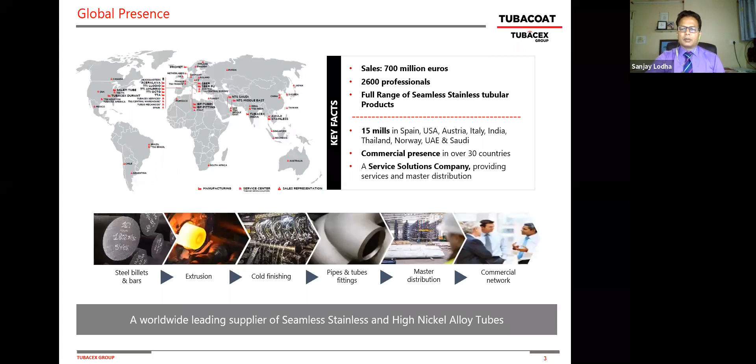So just briefly on Tubacoat, it's a global leading supplier of seamless stainless steel and high nickel alloy tubes, with a presence around the world: 15 manufacturing sites, including Spain, which is headquartered in Bilbao, USA, Austria, Italy, India, Thailand, Norway, United Arab Emirates, and Saudi Arabia. We do 700 million euros in sales, and we do the entire cycle chain, from making our own steel at our mills in Spain, to extrusion, cold and hot finishing, and finished products, whether they are flanges or tubes and all the pipes, then master distribution in more than 30 countries, with a commercial network.

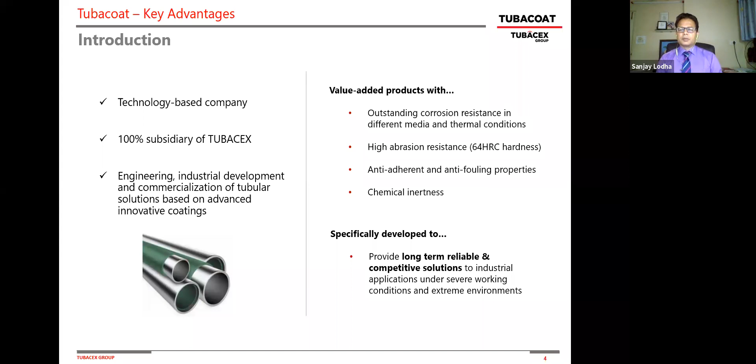The critical applications we focus on are oil and gas, chemical industry, petrochemicals, and power generation. The equipment we work on includes furnaces, heat exchangers, boilers, tubular reactors, and condensers. This is where we employ this tubular technology, and this coating can be internal or external depending on the application and conditions, and these coatings can also be customized.

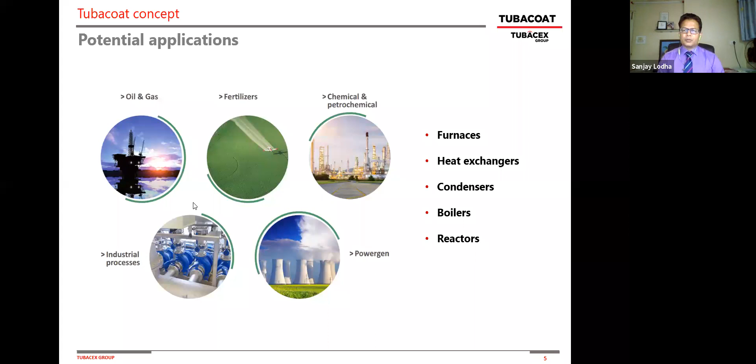I'm going to take you through some key properties of this Tubacoat technology, such as the morphological properties, mechanical properties, chemical properties, and thermal properties, so the audience has a feel for why these properties help against corrosion, against fouling, and against coking.

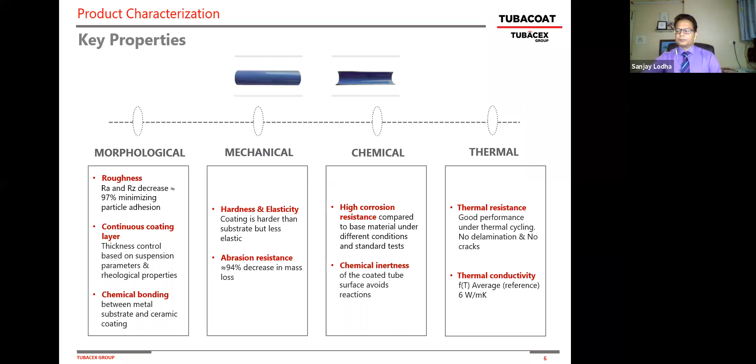This coating is a continuous, homogeneous layer managed through an automated process and rheological suspension properties. In this automatic control process, the coating is 150 microns, or 0.15 millimeters, and we're able to control the thickness across the length of the pipe with the same thickness, measuring minimum at the start, middle, and end, getting minimum, maximum, and average thickness properties, controlling thickness in a very unique way.

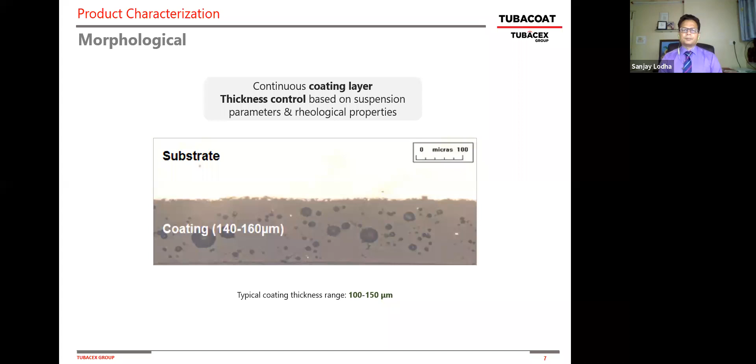The surface of the coated tube is equivalent to a glass finish, a mirror finish, very smooth. The smoother the surface, the less resistance to flow, and the less resistance for particulates and metal compounds to deposit on the surface and begin the fouling process. By having this smooth surface, we're minimizing any tendency for particulates or other matter to deposit and begin the fouling and corrosion process.

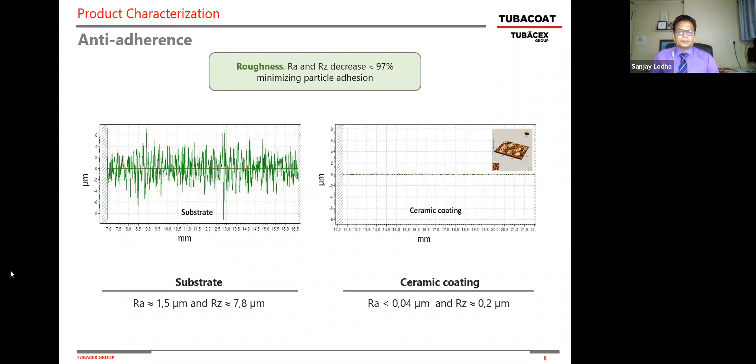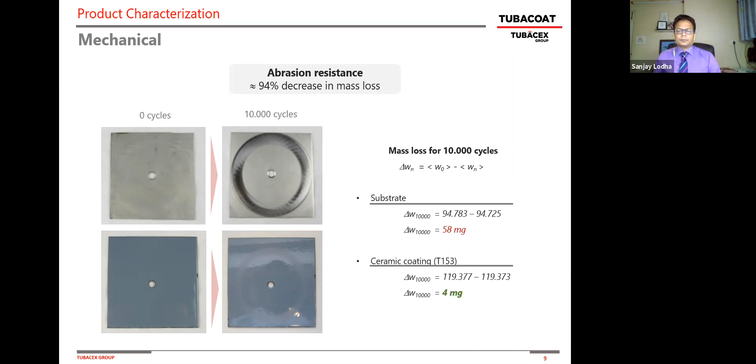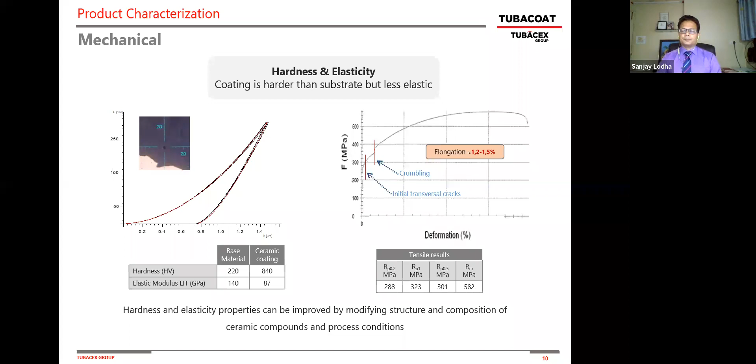In any refinery or petrochemical process, you have startups and shutdowns, rapid heating and rapid cooling - just like online spalling in a delayed coker, or steam air decoking, or pigging. At least for the first two, where you have thermal shock with expansions and contractions, this property comes in very handy.

We take the thermal cycling up to 450 degrees Celsius, close to 850-900 degrees, then do rapid cooling over many cycles. On the right side, another chart shows us taking the temperature from 1200 to 1500 degrees Fahrenheit in intervals, then doing rapid cooling to ensure there's no damage to the coating or delamination, because that's exactly what happens in online spalling - you have contraction and expansion along with steam heating and cooling, and the coating material expands and contracts accordingly, similar to the substrate. This property is very important.

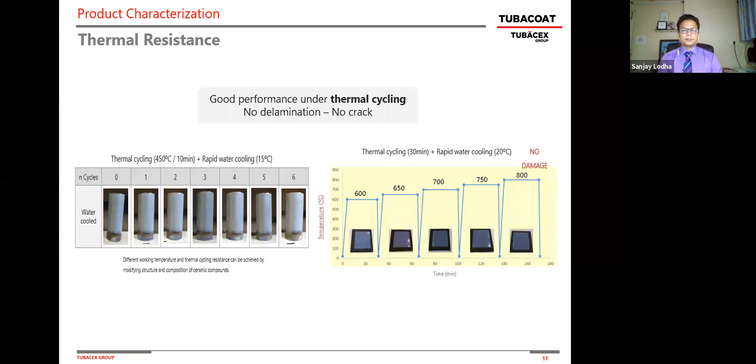As we all know, fouling is a very important property and discussion for any heat exchanger or heat transfer media. Across refineries or petrochemical plants, we have hundreds and thousands of heat exchangers, and they all have fouling issues that happen due to chemical reactions between products, precipitation, or corrosion. So a critical part is how you minimize that fouling.

When you apply this coated tube inside the tube, the deposition rate of particulate or fouling matter decreases because the tubes are chemically inert and very smooth, like a glass finish. Also, the removal rate of this fouling material increases because it won't stick to the surface of the tube. Because of that, heat transfer loss is reduced significantly, and since you don't have that fouling and heat transfer loss, your fluid flow and process throughput maintain at a steady state. That's an important characteristic of the Tubacoat.

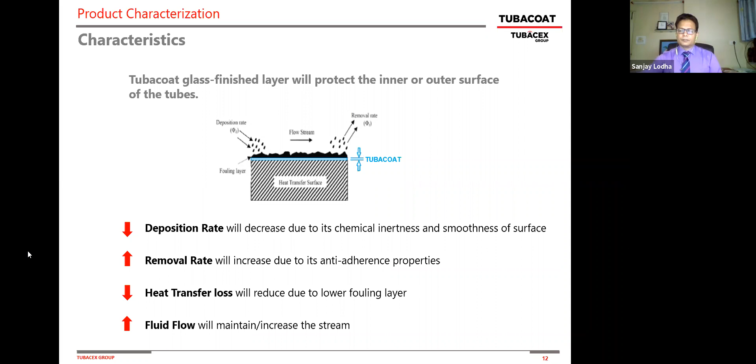This is a study done on the fouling rate by a major US refinery over a period of 7 months using crude oil, heavier feedstock. What you see here is the rate of fouling at a given velocity. The blue dots are for the baseline carbon steel tube, and the red dots were taken at a given velocity of 1.2 meters per second. You can see significantly higher fouling avoidance for the coated sample, and eventual deposition doesn't adhere to the surface because it's very easy to remove. The difference is as much as 4 times on the high side, showing the rate of fouling being reduced for the coated tubes.

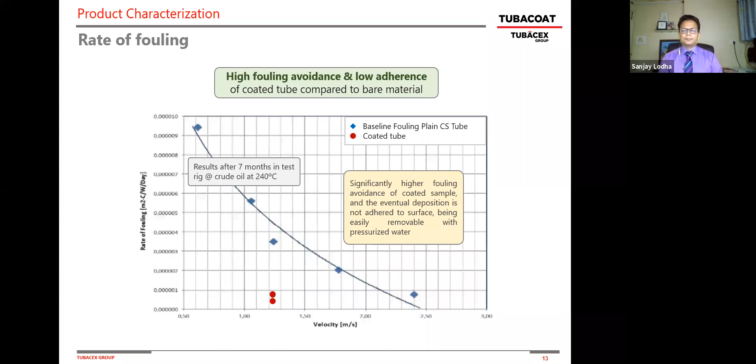This is another example of the chemical properties. I took one example of hydrochloric acid and sulfuric acid over 2000 hours: 10% hydrochloric acid at 22 degrees, and sulfuric acid at 30%, which is very corrosive. Using the European test in both conditions, this Tubacoat material holds very well. There are many more tests we've done with molten salt, sodium hydroxide, you name it, and this holds very well in most applications.

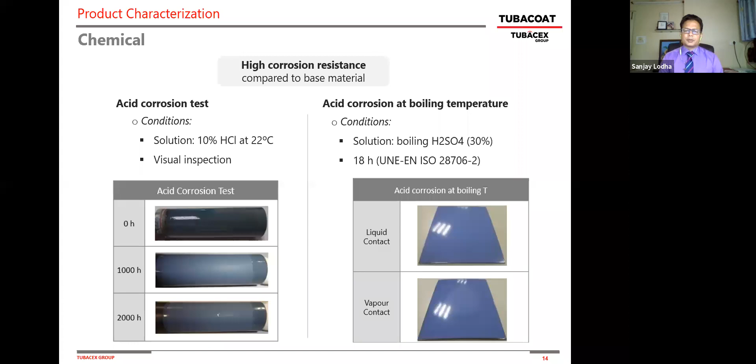In summary, this coating is vitrified above 1470 degrees Fahrenheit, about 800 degrees Celsius, and because of that vitrification, there is a chemical bonding and glass-like properties between the substrate and the coating material. Because of that, we're able to bring that coating to a very low roughness, which helps with fouling and coking resistance. The chemical bonding created through vitrification gives a very strong chemical bond that provides excellent corrosion resistance. The hardness is 4 times greater, giving very good abrasion and erosion resistance.

The chemical bonding gives us a window where you can operate these coatings close to 1500 or 1550 degrees Fahrenheit, and that works very well. As I explained, this coating is an automated proprietary multi-step process, so it can only be applied in our factory, not at the site. What we do at the site is small repair jobs, small welding jobs with portable instruments. Otherwise, most of the work is done in our factory.

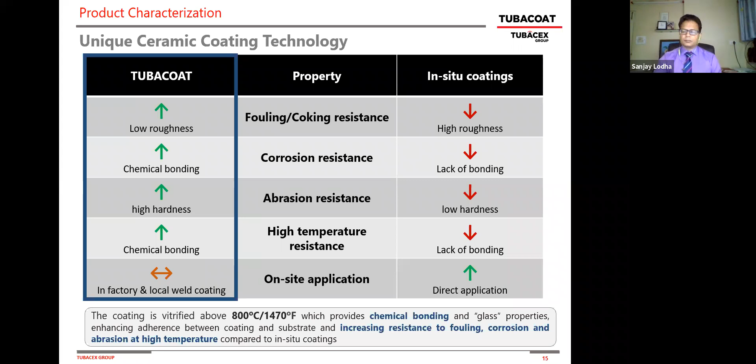Now I'm going to explain the coke deposition in fired heater tubes. Next slide.

I think most of you work in a refinery, whether in a Visbreaker, a delayed coker, a crude unit, or a vacuum unit. We have these high conversion process units that process low value, heavy feedstocks, whether it's gas oil, vacuum residue, or atmospheric bottoms, and you try to run them through a conversion unit to make high value distillates or clean fuels.

I'm showing a picture here of a delayed coker. Besides the distillates, you also make coke. In the process, you're thermally cracking the feedstock, and you're creating coke that deposits in the radiant section of the furnace, and that is a problem. Next slide, please.

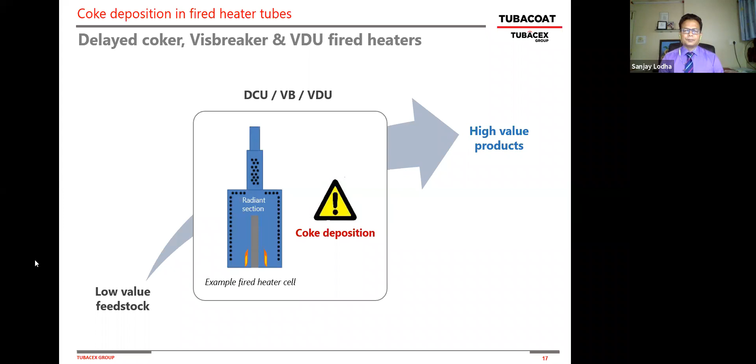As you can see through the tube, as the coke layer grows, heat transfer reduces, tube skin temperature goes up, you have hot spots, your effective heat transfer area is reduced, and you have a pressure drop. You come to end of run due to high temperatures or pressure drop, and you have to shut down, do online spalling, steam air decoking, or mechanical pigging.

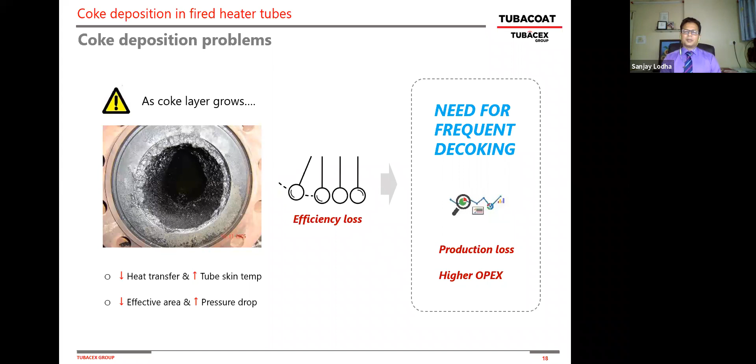And when you do that, there is a cost reduction in throughput, huge conversion cost, maintenance cost, safety cost, and all that is a dollar value.

Now let me take you through a chemical inertness and coking resistance study that we did with a university in Europe to explain some more properties on how this Tubacoat technology works against coking.

Coated tubes have two things that work very well for heater tubes. One, these coatings are chemically inert, so they minimize the coke forming reaction. Second, once you form coke, does it stay in the coker furnace tubes or move further to the coker drums? It has an anti-fouling, very smooth, anti-adhering surface that allows minimum coke deposition. Because of these two properties, you get significantly longer run length between spallings or decoking.

Since the surface is much cleaner, your fuel consumption is lower. And since you don't have as many spallings and piggings, there is improved safety and reliability. So the advantages are very well explained.

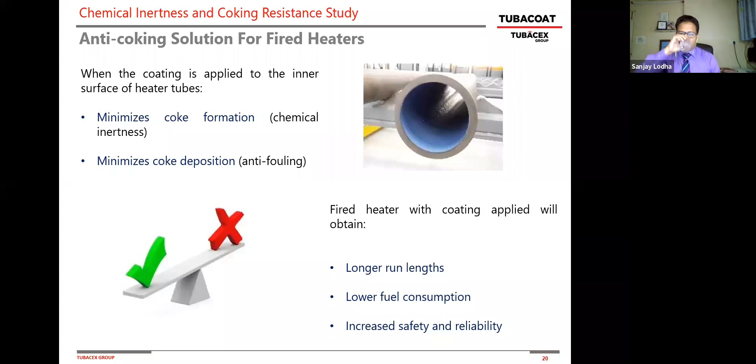This experiment was done with the European university, where we took the chemical compound dimethyl ether and cracked it. If cracked properly, it's equimolar cracking into carbon monoxide, hydrogen, and methane, generating no coke - that's the thermal route. But this doesn't happen in real life. You have many side reactions: the Boudouard reaction that breaks down carbon monoxide to CO2 and carbon, and methane decomposition into hydrogen and carbon - this carbon is what you don't want in the furnace tubes.

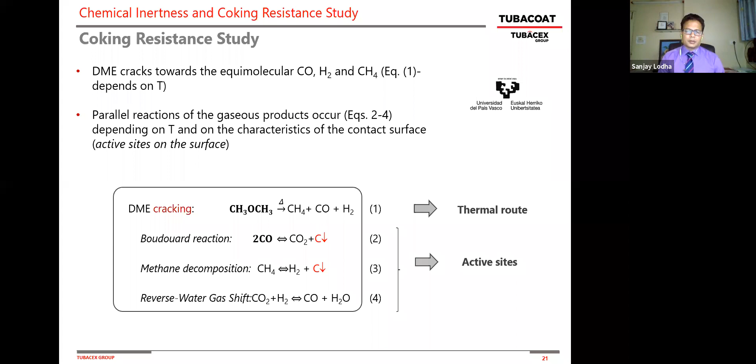What we show in this slide is from an experiment done at the university in a furnace heater, with multiple cycles. What you see here is one heater without the coating, the other with the coating.

In Cycle 1, looking at T10 conversion for the non-coated tube, the temperature is 587 degrees. When you shut down and start again, T10 starts 100 degrees earlier, indicating you're promoting the carbon forming reaction because the metal surface takes an active part in it. But with the same substrate using a coated tube, on Cycle 1 and Cycle 2, there is no difference in startup run T10 temperature - T50 and T90 are almost identical, proving that the chemically inert coated tubes prevent or minimize coke forming reaction through multiple cycles, where the active metal otherwise promotes carbon formation.

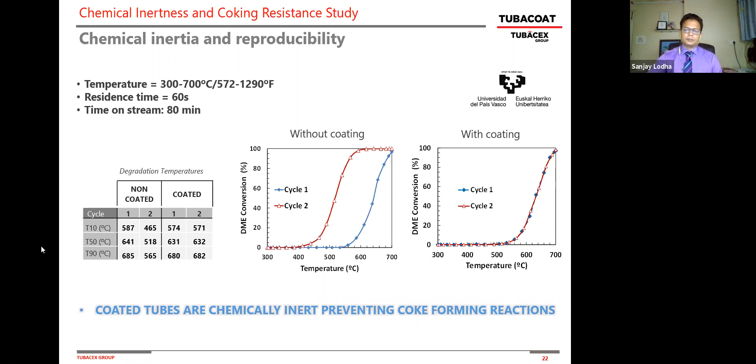This slide shows the carbon forming reaction - we use an equation to determine how much carbon is formed. What you see here, without coating versus with coating, there's a huge difference in the amount of carbon formed - a factor of 10 times lower carbon formation.

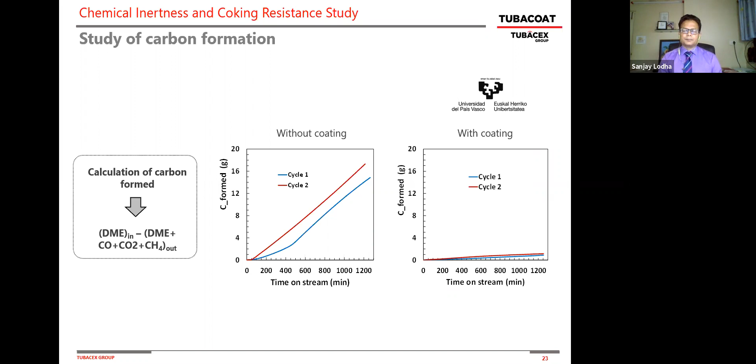Once you make the carbon, where does it stay - does it deposit on the tube surface or not? In this experiment, we burn the carbon through an oxidation process and integrate CO2 chromatograph curves. On the surface without coating, you see very high CO2 curves over a significant period, 400 minutes, 360 minutes. But with the coating, there are no CO2 curves and it goes away within 60 minutes, reconfirming that carbon deposition is very, very low on the coated surface.

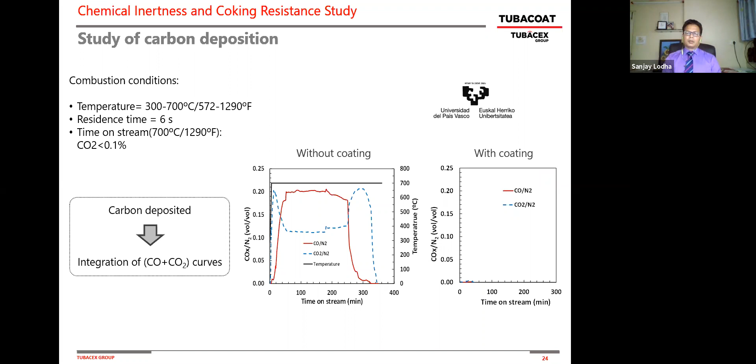In summary, the chemical inertness of the coated surface avoids coking reactions. Carbon formed is 10 times lower, and whatever carbon is formed, its deposition is 100 times lower - significant improvement in both carbon formation and carbon deposition with these coated tubes.

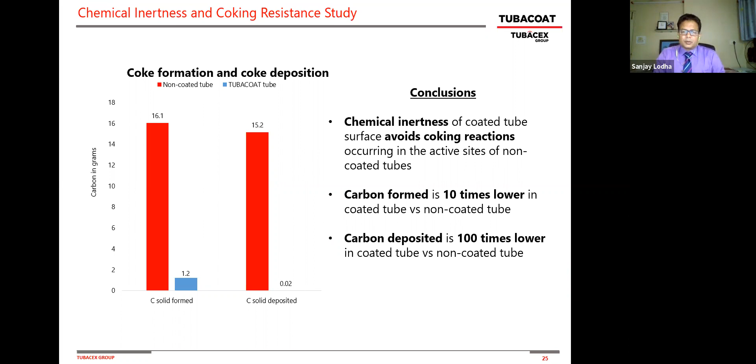Now I'm going to get to the real subject of the case studies. As I said, some have already been implemented, some are already in the pipeline, and some are yet to be implemented. I put together 5 or 6 case studies and different examples, and now I'm going to go through them.

And so they have a quite frequent shutdown for pigging. To be accurate, they do 2 piggings per year, and that is about 8 days of shutdown. That's a significant loss of production.

Then they have a pre-heat exchanger upstream of the furnace that is also taken out of service due to coke accumulation, and poor heat transfer that gives you higher fuel consumption. So they agreed to go with the Tubacoat solution, 4-inch dia, inner coating, schedule 80, 317 stainless steel, and also the flanges and the bends.

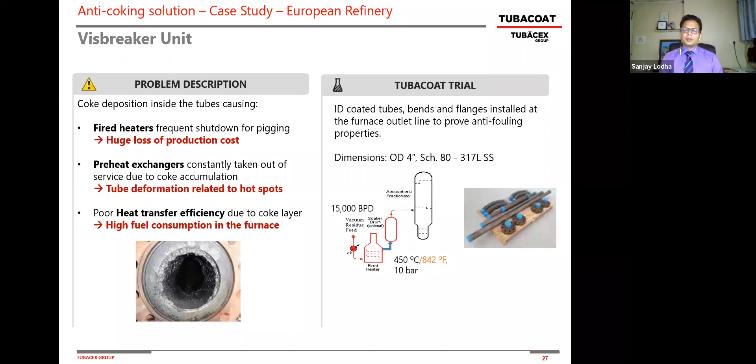We supplied that. Next slide, please.

So trial after 9 months, now it's been 14 months, but this was done at the 9 months. What we saw after 9 months is a very thin coke layer, not even detected by the radiographic test, and in essence, a 75% reduction in the coke deposition.

And whatever coke that was there was very, very easy to remove, 3 times lower the water pressure. You can just put some water and it will come off. Basically confirming that in commercial applications, these coated tubes are able to help in minimizing the pigging or similar activities.

And what we saw in the conclusion, 8 days of downtime, or 7 days of downtime, throughput value was $1.1 million for this given unit, and some other benefits such as a reduction in maintenance, a benefit of fuel consumption and heat exchanger cleaning, altogether $1.5 million per year.

Return on investment much less than 1 year. Next slide.

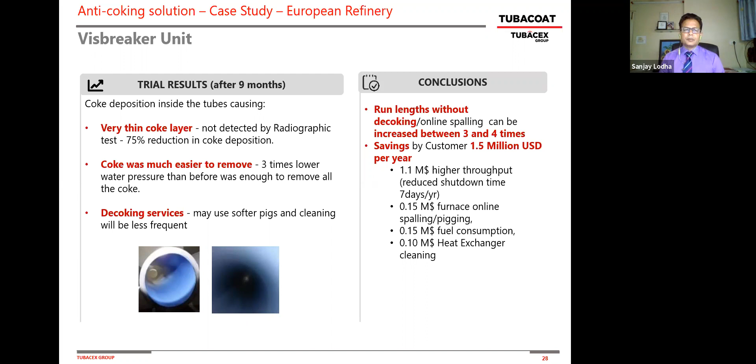This one is a delayed coker unit in Asia. It's 1 delayed coker with a capacity quite big, I think it's the second largest in this part of the world. 124,000 barrels a day. Has 3 furnaces, 6 passes. Each pass has 30 radiant tubes. Very common P9 material that's used in mostly many delayed cokers we see around the world.

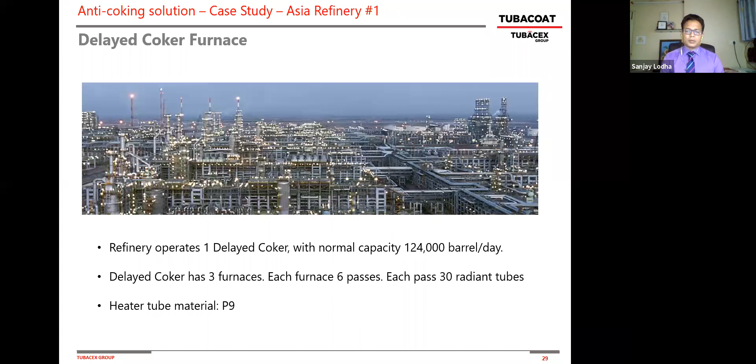So they have a frequent decoking as required due to coke buildup. One, because of the high pressure drop. Second is the high tube metal skin temperature. And they take out each furnace for pigging every 3 months, and also online spalling every 30 to 45 days. They do 2 passes per furnace, and they have 6 passes per furnace.

And during the pigging, their capacity is reduced to 70%, and during online spalling, their capacity is reduced to 93% while they do the spalling.

And with our modeling work, we work with the customer based on their information. Every time it's taken out of service for pigging, the cost is over 4 days, 3.6 million every 3 months. And also when they do the online spalling, reduction in throughput is about $125,000 cost per furnace. So it's quite significant. Next slide, please.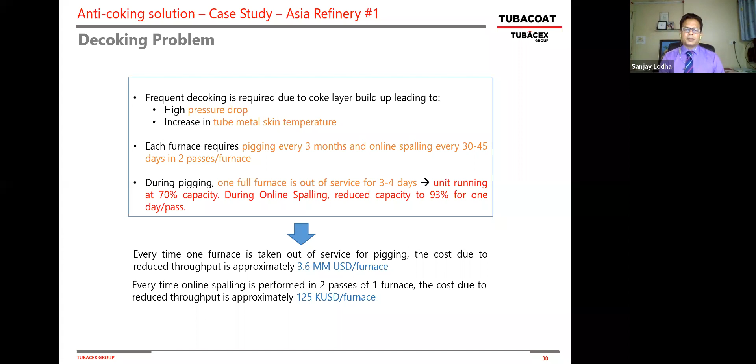So we did Tubacoat technology solution modeling for the unit, and what we see here is the cost of the tube over a 5-year period. When we say the cost, we include the cost of the tube along with the advanced coating Tubacoat, plus cost due to reduced throughput during decoking and cost due to higher fuel consumption.

And by extending the run length without decoking by 3 times, we're able to give them $10 million benefit per year. Over 5 years that's about $50 million if they were to do all the tubes and radiant section with the Tubacoat technology. Just the online spalling, instead of 30 to 45 days, it would be 90 to 100 days,

and mechanical pigging, instead of every 3 months, it will be 8 to 9 months. That's a significant value for any refinery, any customer. Next slide, please.

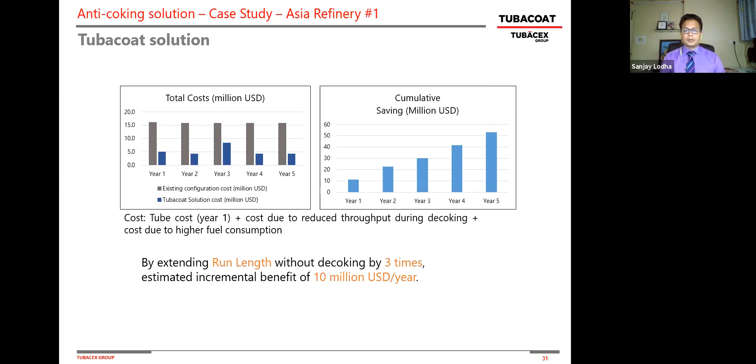Now, everybody has questions, and I saw some questions in the chat room about whether this coating works with online spalling, steam decoking, or mechanical pigging. So I just put a slide, and that should answer many questions.

So the coating is designed to withstand online spalling because it's designed for high temperature and for thermal shock, and the coating has the same coefficient of thermal expansion as the substrate. And as the substrate can change from P9 to 347H or anything else, we're able to customize the thermal coefficient of expansion for each substrate.

Second part is mechanical pigging. Of course our regular pigs, which are 82 or 84 Rockwell C, are a bit too hard for something like this coating. So we have worked with the coking company, and we have come up with pig studs that are a little bit softer, 64 Rockwell C or 800 Vickers number, and they can do the mechanical pigging without any damage to the coating surface.

And they can be available to any customer anywhere in the world. So we just modified that.

And also remember, when we use these coated tubes, we're reducing significant amounts of inorganic contaminants, such as the iron sulfide and the solid coke. So the mechanical pigging requirement is significantly lower, but also the material you have in the tube that's coking is significantly lower for the inorganic materials. That's another part. Next slide.

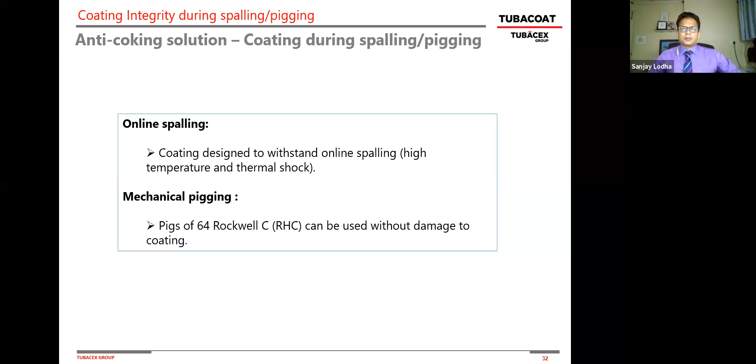This one is another coker in Asia, again a P9 chrome material, 42,000 barrels per day unit. They do spalling every 50 days, 7 spalls per year, 6 days per spal, that's 42 days they run at 85% throughput. If they were to run Tubacoat technology, their 85% throughput time would reduce from 36 days down to 12 days. They would have 24 days of savings at full throughput value, and that's $3 million per year benefit just from the throughput.

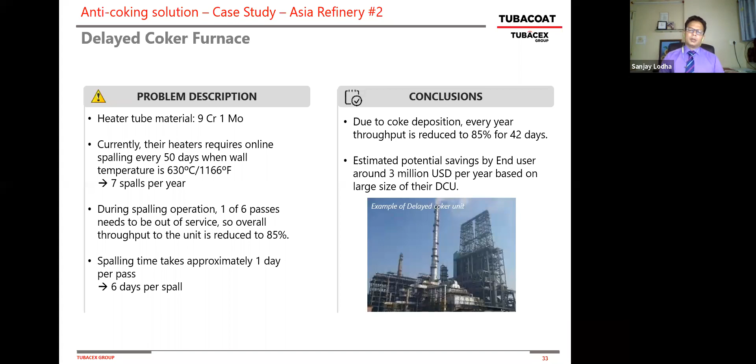This project is in the pipeline, in the budgeting phase, and will be implemented sometime 4Q 2021 or sometime in 2022 with this particular customer. Next slide, please.

This one is a North American refinery on the West Coast, and their heater tube material is 347H, which has a higher end-of-run temperature, maybe another 50 to 100 degrees Fahrenheit over the P9 material. So many companies now prefer 347H - more expensive, but it gives higher end-of-run temperature, which helps on the OpEx side. This heater requires online spalling every 2-3 months and mechanical pigging once per year. Total shutdown is 6 days for pigging, and throughput is reduced to 75% for spalling over 16 days. Potential savings of $2.5 million.

The project was to be implemented in March of 2020, but because of COVID-19 and the oil scenario, it has now been moved to 2021. We'll keep you posted on the outcome of this trial as well. Next slide, please.

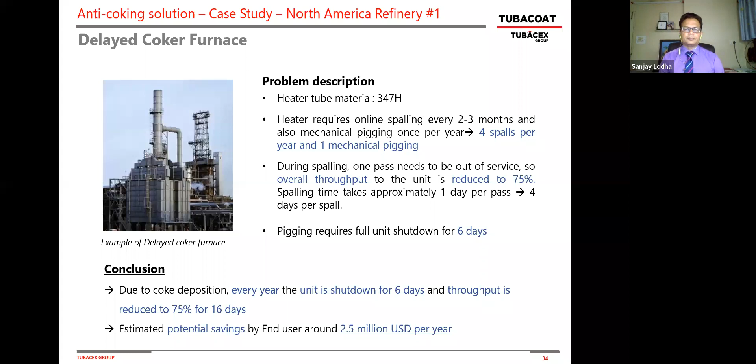This one is something we just did recently, a vacuum distillation unit furnace. This furnace outlet line had a severe coking problem. Again, it's a North American refinery where they have this outlet line replacement due to coking. These are 8, 10 and 12 inch OD tubes that have to be replaced every year or every 13 to 14 months, with frequent decoking operations and mechanical pigging. There were also a lot of traces of polythionic acid stress corrosion cracking. We just supplied these tubes and they'll be installed very soon.

Base material is 317L stainless steel, OD is 8 inches. Working with the customer, validating the modeling work and feedback, we expect return on investment in less than 1.5 years. I will keep you updated in our next presentation on the future performance of this unit. Next slide.

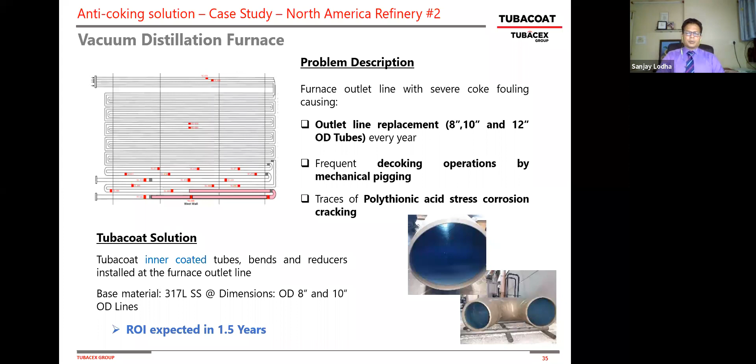This one is a resid hydrocracker, again in North America. They have 8 resid hydrocrackers feeding very heavy gas oil feed, and they have close to 800 risers used for proper feed distribution in the reactor. Temperature close to 750 degrees Fahrenheit, 130 bar pressure, and due to the velocity regimes of the hydrocarbons, they have severe fouling at the bottom section of the hydrocracker risers. Once they have this fouling and cracking, it leads to maldistribution, and they're not getting the conversion they would desire. With the coating, they will be able to minimize this erosion and fouling, and we expect a far better conversion.

Again, this project is for 2021 due to COVID-19, and we'll keep you posted on the benefits that come out of this trial as well. Next slide.

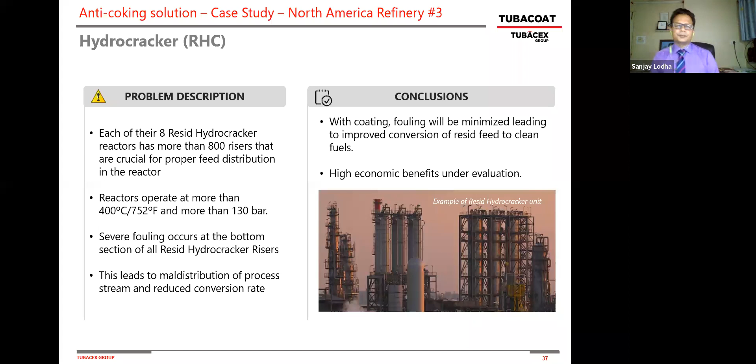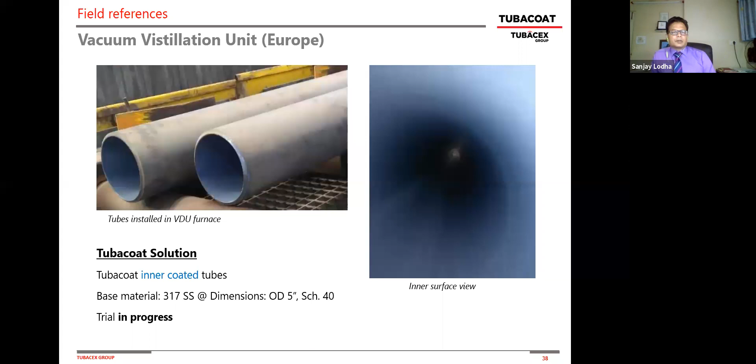So I'm going to take you through one more commercial example. I think I covered quite a bit of coking issues in the delayed cokers, visbreakers, and vacuum units. Now I'm going to take you through another corrosion issue, again with a refinery in North America, where they have a huge corrosion problem and how they implemented the Tubacoat solution. Next slide, please.

Okay, as you can see on the screen, the flue gases in this recuperator heater in the coker calciner are extremely corrosive - you've got sulfur, you've got vanadates, a very corrosive environment. Metal surface temperature of 570 degrees Celsius, close to 1000 degrees Fahrenheit. You can see the tubes basically can't survive this environment, causing chemical corrosion due to these vanadates and sulfur. They have to plug the tubes, which is a huge efficiency loss and operation cost, and they have to reduce throughput in the coker calciner. Their current material is TP310. They tried many other metals and alloys, nothing worked.

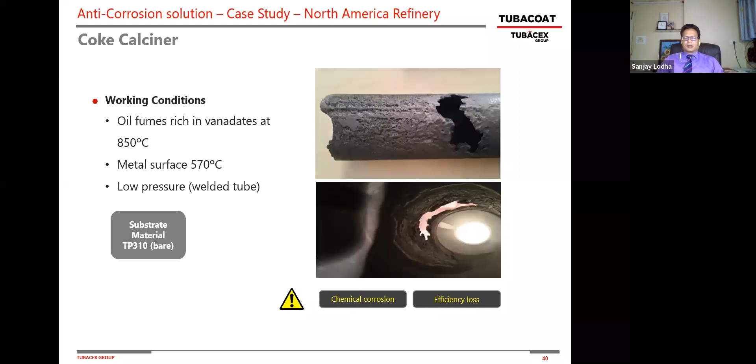We happened to meet them at one of these conferences, similar to what we're doing today with RevCon. They said, well, we tried everything, nothing really worked, so let's try the Tubacoat technology. Let me show you what happened in the next slide. Next slide, please.

So what you see here is we supplied 9 TP310 tubes, outer coated with Tubacoat, in this recuperator heater. They were installed in May 2015, now almost 5 years ago. After 10 months, when you see through a furnace window, the uncoated tubes are completely broken and blinded, though not melted. Whereas the Tubacoat tubes, all 9 of them, are fully visible even after suffering overheating at temperatures close to 1500 degrees Fahrenheit.

The results were so good that they decided to go for a full commercial trial, a full commercial run, which I will show you in the next slide.

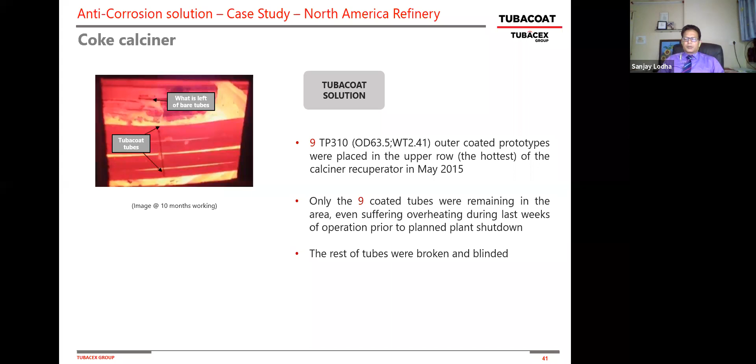So they went with 800 tubes, TP310, and as you can see, the two different color schemes of the Tubacoat technology aren't just because we like different colors. They were designed for different temperatures. As I said, we customize these tube coatings for different applications, conditions, and temperatures. Some tubes were designed for 700 to 750 degrees Celsius, and some for another 20 degrees higher. They were installed in April 2017.

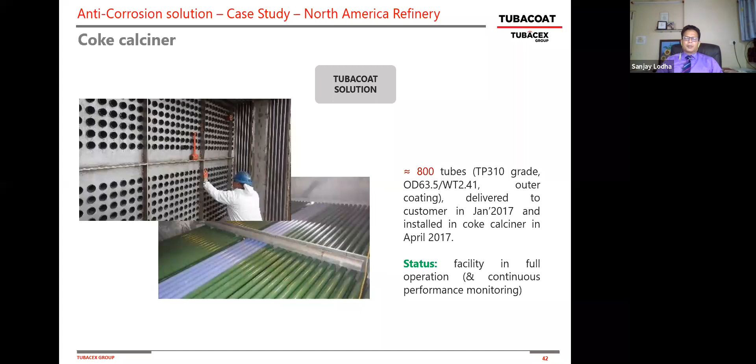So what you see here, again looking through a furnace window in the middle picture, is a unique, consistent temperature profile across all the tubes. You don't see any tubes broken, melted, or plugged. Full heat transfer and full throughput capacity are being utilized, and they got close to 2 years, 3 times the cycle length they would have otherwise had. Savings of close to $2 million for this customer, a West Coast big refiner in the US.

They were very happy with this particular outcome, and we continue to work with them now as a regular supplier on multiple other applications. Next slide, please.

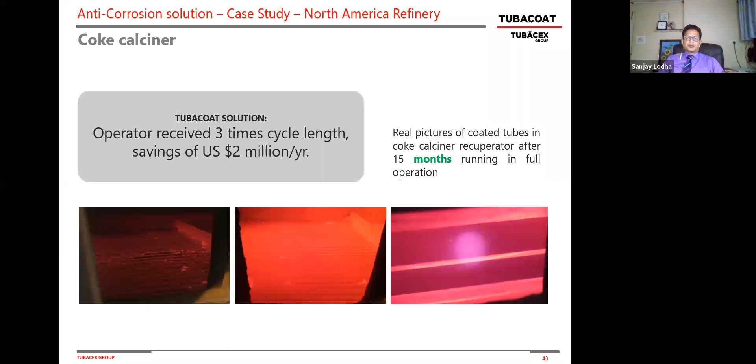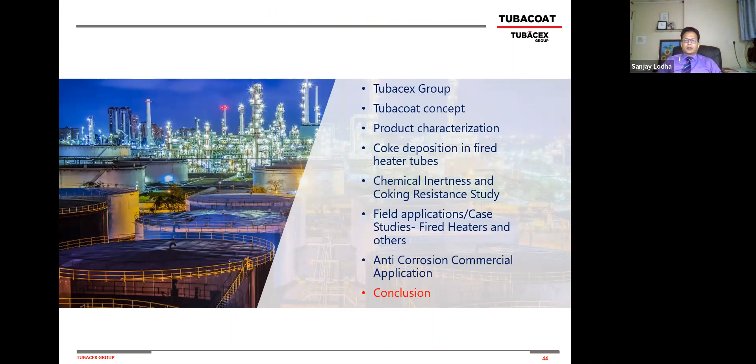So let me take you through a conclusion slide. In summary, I've taken you through the properties of Tubacoat and case studies for various units, including corrosion. Whether it's a DCU, vacuum unit, VDU, resid hydrocrackers, or any corrosion problems you have in any other unit, Tubacoat is able to give you a longer run length, improving overall throughput, and that makes it very significant.

Easier and much less frequent cleaning reduces maintenance, helps with safety, and gives tremendous value. And since the surface is cleaner, heat transfer is much more efficient, giving you significantly reduced fuel consumption and reduced carbon footprint on the environment.

Reliable, as I said, we developed this technology over a 10-year period. We're in the pipeline to do many commercial applications and trials for different applications. We have an in-house R&D and metallurgy department, a huge technology department, where we work with customer problems and customer data, and we work on the cooperation and collaboration front. We're also working with a number of licensors where they will exclusively use our technology for their heater technology in a given delayed coker unit.

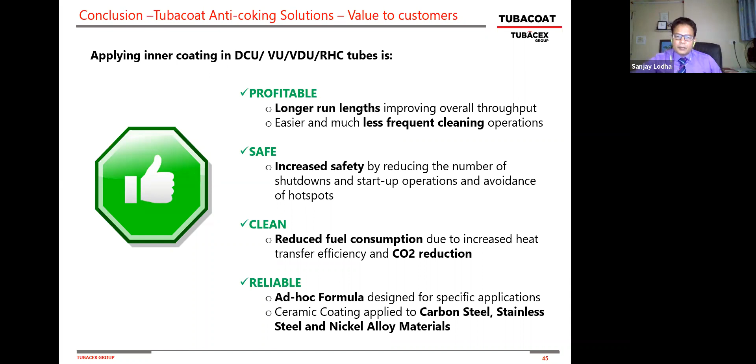I think this is my last slide. I'm going to conclude this presentation with this last slide, and then I'm going to open the floor for the next 20 minutes for Q&A. Thank you, Becky, back to you.

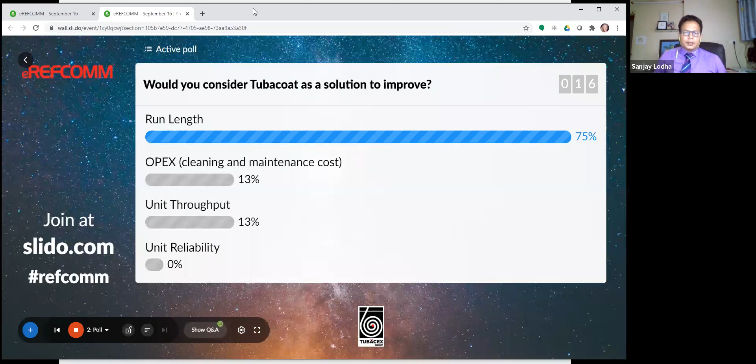If I can get the Slido. Okay, good. So we see a lot of people are interested in the run length, which is great.

Okay, the first question: how well does this coating withstand pigging? This question came up and I think I answered it in my slide. This coating can withstand not only online spalling and steam-air decoking, but also mechanical pigging.

First, pigging frequency will be significantly reduced because this technology minimizes the formation and deposition of coke, particularly inorganic coke, which is very solid, and iron sulfide. And as I explained, this coating can withstand mechanical pigging with pig studs of 62 Rockwell C, 800 Vickers number, where we offer technical assistance and collaboration.

Then there was a question: what shall be the coating reapplication frequency? Very good question, I like that one. First, whatever your tube metallurgy is, whether P9 or 347H, your tube metallurgy life would remain the same, it would not change. You would have incremental life because your tubes are not exposed to the process conditions.

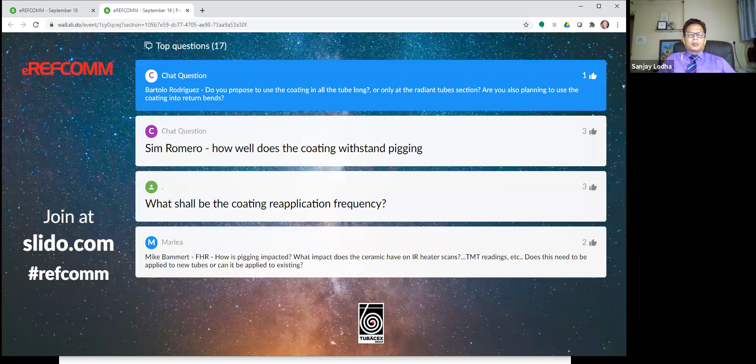Again, feel free to write me. One customer we're working with now has a tube length of 26 meters. What we do in that case is coat a maximum length of 12 meters, so for 26 meters we have 3 pieces. That's how we coat it, and then they're welded into one piece at the customer site.

Let me see what other question we have. How can we estimate the cost of applying this to an existing coker? Well, I love this question, coming from Sim Romero. Thank you, Sim. I really love this question because this is how we work with every customer out there, because it has to make sense for him.

For this to work, the way we work with an existing coker—I think I had a case study which I showed you—most of these cokers are existing cokers, so there are two ways to work. One, we get your field operating conditions from you.

We find out how often you do spalling or decoking. Then we put the modeling work and technology work together with the value proposition, in which case you may have to buy a spare batch of tubes because your shutdown is for a very short period of time—3 weeks, 2 weeks, 4 weeks—and you don't have enough time to coat, send the tubes to us, and coat.

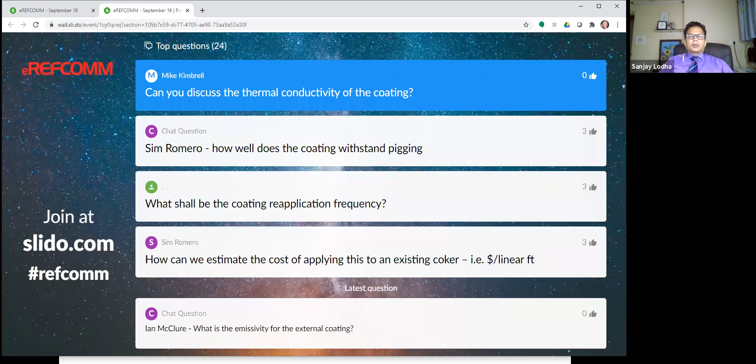Let me see... okay, there is a question from Ian McClure. Let me get to it.

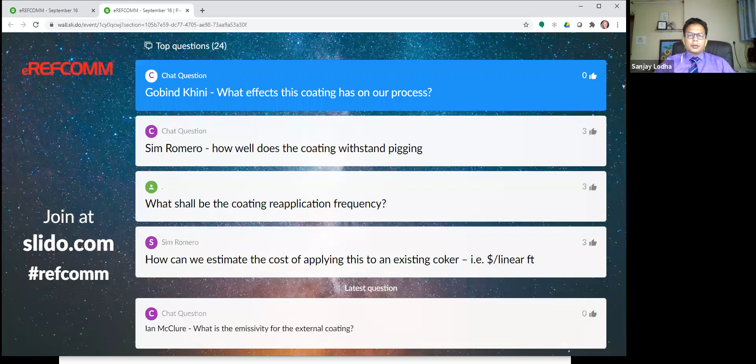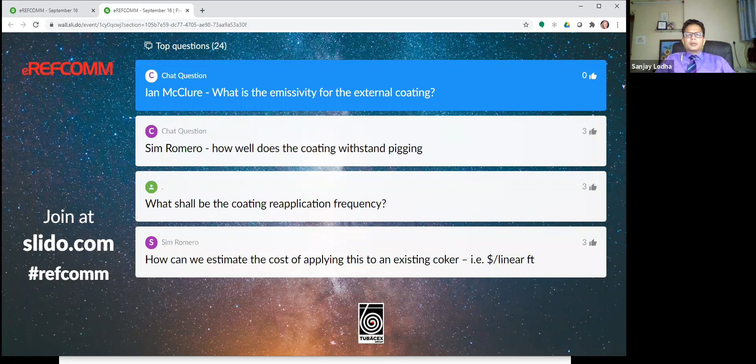What is the emissivity value for the external coating? The emissivity value is somewhere between 0.83 to 0.87. We tried on different metallurgies and different formulas of coating, and that's what the emissivity is for the external coating. I have a slide, and I'm happy to send it if you write me an email with the details.

Very happy to do it. Absolutely no problem. I see a question here now from... oh, it's gone. There was a question from Mike.

How are the tube sections joined together? Are the welds coated in the field? Mike, thank you for that question, we get that from all our existing customers. If your tubes are up to 12 meters in length, they come in one piece. But if you have tubes longer than 12 meters, let's say 24 meters, we will have two sections of 12 meters each. We supply the two sections to the customer, and they will have these two tubes welded at the site. We give them technical assistance on the welding procedures, and that's how they're welded.

Now, the point at which they're welded, the inner part, cannot be coated at this time. That's not a problem because you have a whole length of pipe that's coated, and this is only a small portion with orbital welding, less than 0.3 millimeter penetration. In the field, these small unwelded areas show not much carbon accumulation based on our experience. Independent consultants and experts have also reconfirmed there is no deposition of coke in the unwelded area. Also, there is good enough velocity through the tubes, with inert material and a smooth surface, so coke just keeps moving. The unwelded, uncoated part is not an issue at all in our experience.

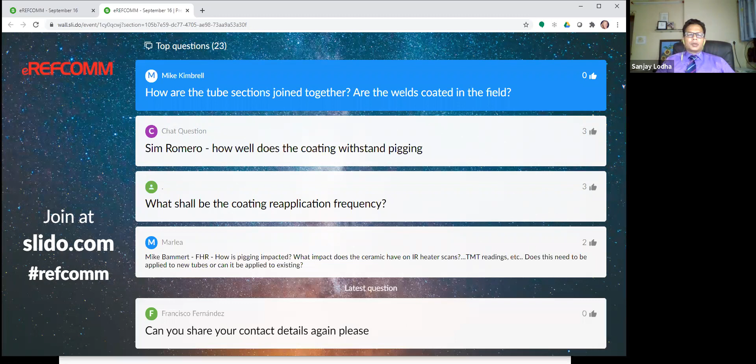Francisco Fernandez asked if I can share my contact details. I'll ask Becky or Marlea from eREFCOMM to show the slide again with my contact details. We have an office in Houston, Texas, and my colleague Jorge, who is also in the conference, can be your contact too. My email is asloda@tubasex.com, and my phone number is also there. Please note it down, and you can also reach out to Repcon, the Coke Busters, one of the top leading companies for decoking services, which is another company we work with for decoking for our customers.

I think I have five or six more minutes, and I saw some more questions.

There was a question about whether this coating can be applied in situ or ex situ, and I like that question. As I explained, the Tubacoat technology is a proprietary, advanced process with multiple steps: surface preparation, automated application of enamel or coating material, and then furnace vitrification. That is only done at the industrial scale unit, so most of the work is done at our plant in Spain. Only small field work like welding, material coating from outside, or repairs can be done with portable instruments like resistors, where we supply the coating enamel to a customer. We provide technical support and also do performance monitoring for a given delayed coker unit, whether it's pressure drops, temperature profiles, or thermocouple temperature measurement over a cycle. We do that working with the customer.

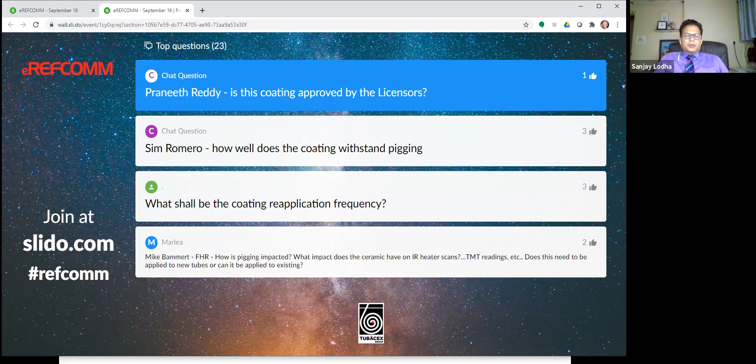I have a question from Mike Bammert of Flint Hills Resources. We're already working with Flint Hills Resources R&D for a trial, and the question is how pigging is impacted. I think this already answered the question — our coating is good enough to work with it.

There was a question on what impact the ceramic has on IR heater scans. In the scanning, as I showed in one furnace, you would not have hot spots. You have a unique, temperature-consistent profile on your heater temperature scans and TMT readings. It will be a much longer time from your startup run to end of run, even within a smaller temperature window, because you're not coking as much, not fouling as much, not depositing as much coke. So end of run is reached much slower compared to without the coating. That's how the system works.

So I think we recommend you have the thermocouples, measure the pressure drop, do the heater scans, and when you shut down, do a videoscopy and the other checks to make sure we meet your requirements.

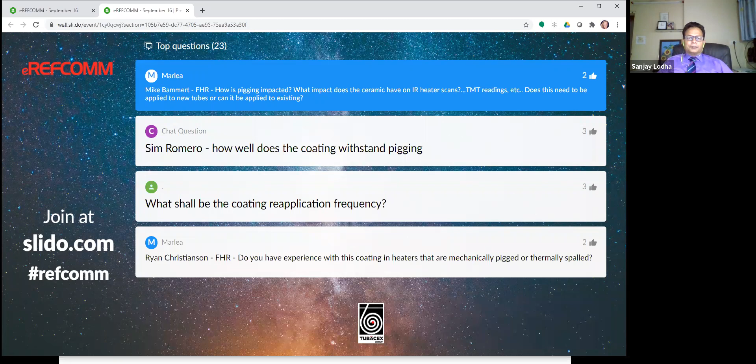Let's see, I think I have 2 more minutes. Let me see what other application. I think I answered the coating application question. There's a question asking to share the slides for better understanding, from one of the customers. I think I'll leave it to the RefComm team to share the slides. Of course, it may be on their website, but we're open to it.

And again, we'll be happy to share it. I think you've seen my contact details. Feel free to approach me and I'll be happy to send you a PDF copy. I think this does it for the Q&A session. A lot of good questions.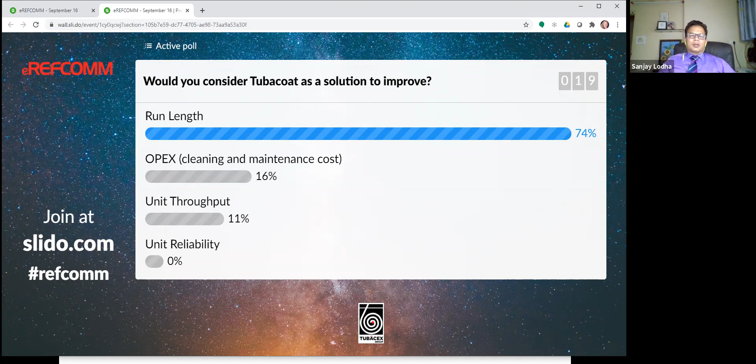As I can see, most people love the higher run length, and then we can see the OPEX, unit throughput, and unit reliability. So run length is what people want, and this technology will give you that run length, working together with us as your partner. Feel free to contact us.

I think with this I will conclude the Q&A session. We're right at 60 minutes, a very generous time given by the RefComm team, by Marlia and by Becky. I really thank you very much. Feel free to reach me, and I hand it back over to Becky and the team for the closing comments.